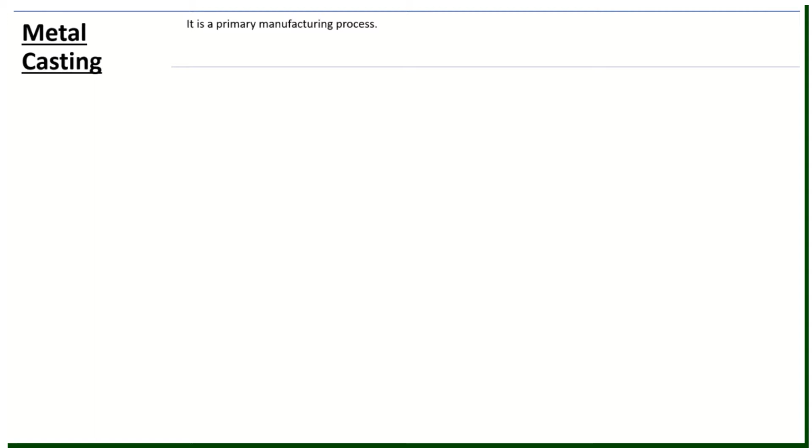Generally, this process uses liquid metal to produce desired parts. Casting is one of the earliest metal shaping methods known by human beings. It involves pouring molten metal into a refractory mold, which has a cavity with the desired shape, and then this liquid metal is allowed to solidify. Once it is solidified, the object is taken out from the mold.

This casting process has various advantages. Let us see why the casting process is being used widely, even though it cannot produce parts with high dimensional accuracy and good surface finish.

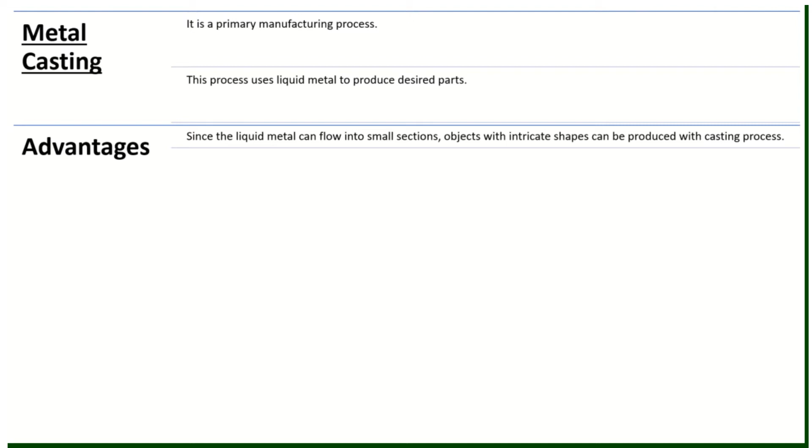Since liquid metal can flow into small sections, objects with intricate shapes can be produced with a casting process. This is the first advantage. Because of this nature, complex geometrical objects can also be produced with casting operation, so it is being used widely. This casting can be done for both ferrous as well as non-ferrous metals.

The infrastructure of casting, that is the tools and molds used in casting, are very cheap and simple.

The casted products don't have any directional properties, because once the liquid metal is allowed to solidify, all the parts of the casted product cool uniformly in all directions.

Casting can be performed for parts with a larger size and weight. These are the advantages of the casting process, and because of these advantages, the casting process is widely being used in manufacturing industries.

Apart from the advantages of casting, which has several limitations, let us see what are the drawbacks or limitations of a casting process. The casted products with high dimensional accuracy may not be achieved in the sand casting process.

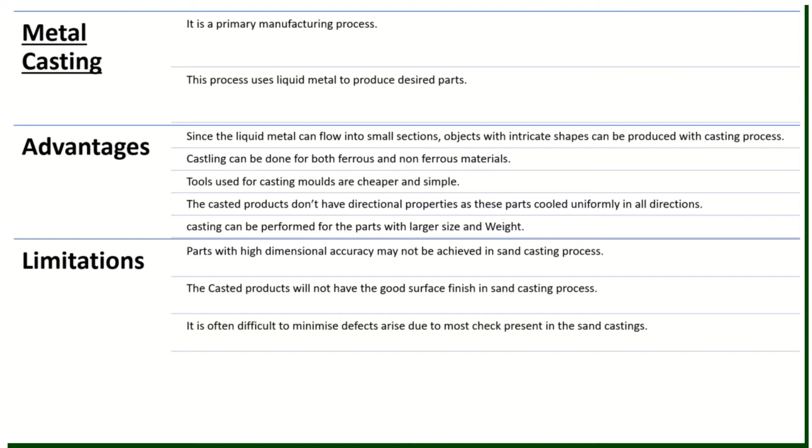It is often difficult to minimize the defects that arise due to moisture present in sand castings. Since it is liquid metal, and the sand content has moisture present, the casted products will have certain difficulties and defects. So it is very difficult to minimize such defects that are due to this moisture content in the sand castings.

This casting process is widely used in various applications. Many of the automobile parts and machine components are made up using the casting process. Typical casting products are cylinder blocks, liners, machine tool beds, piston rings, wheels, and bells. These are the various automobile parts that are manufactured with a casting process.

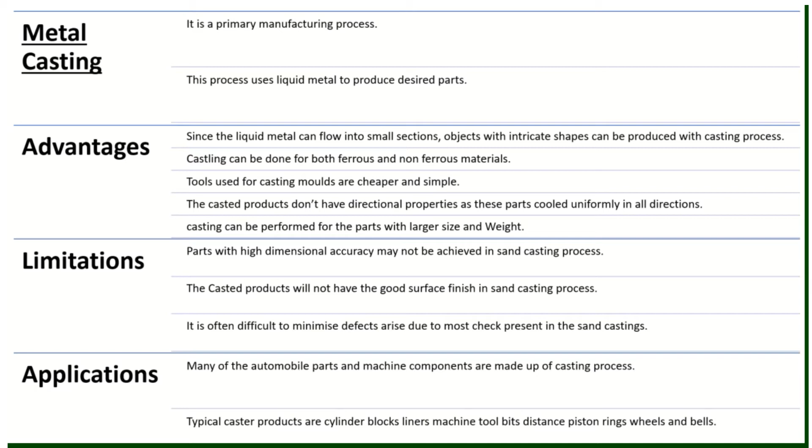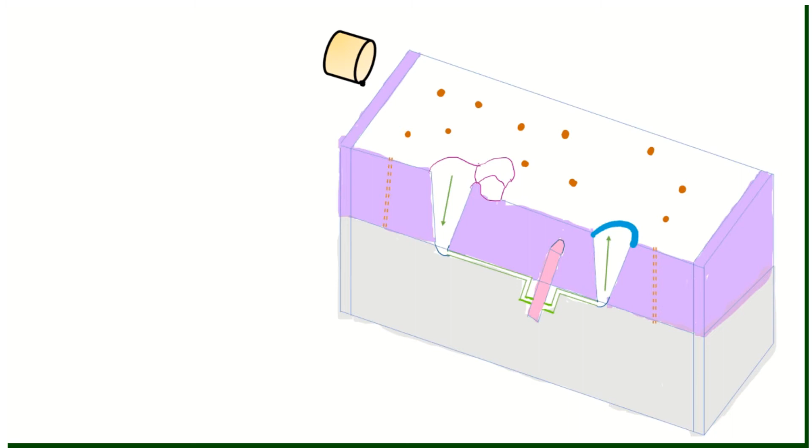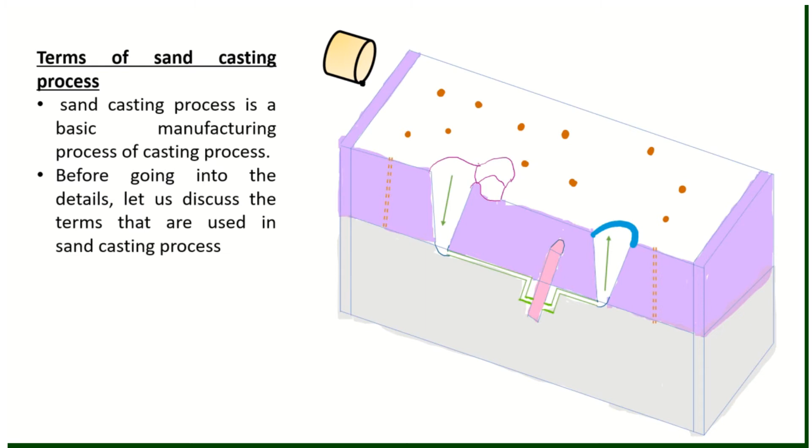Now let us have a look at how the casting process is actually carried out, and what are the various terms or nomenclature of a sand casting process. This sand casting process is a basic manufacturing process of casting. Before going into the details, let us discuss the terms that are used in sand casting process.

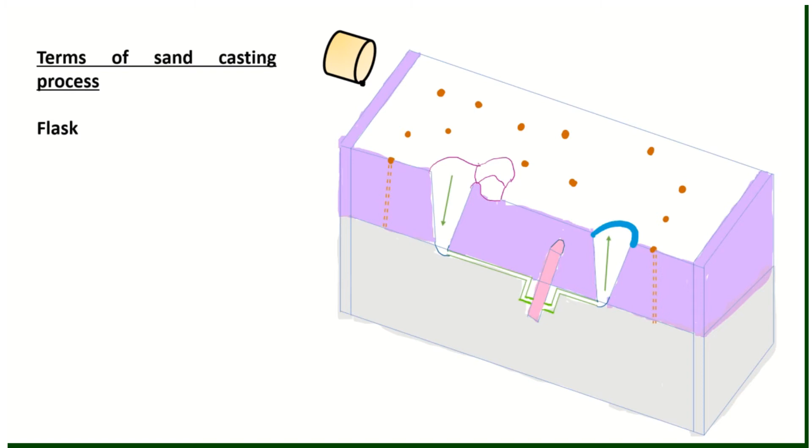In casting, the first term is flask. Flask is nothing but a molding flask which holds the sand mold intact. Depending upon the position of the flask in the mold structure, it may be referred to as drag, which is the lower part of the mold.

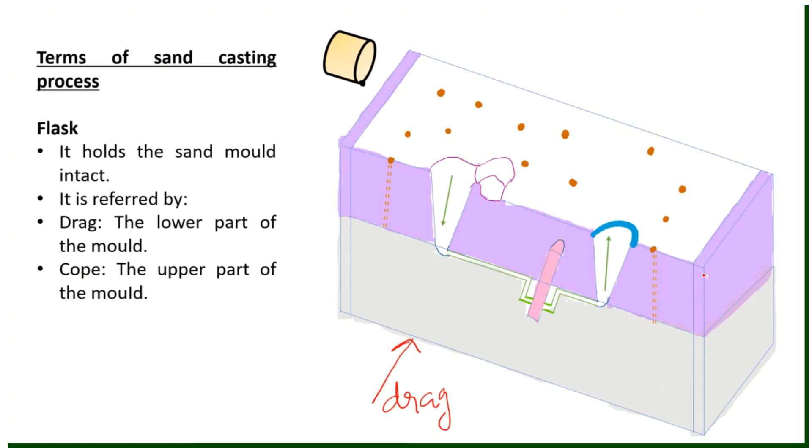If you see this gray colored part, the area occupied with gray color, that is the lower part of the mold, it is called the drag. And cope, the upper part, which is in purple color, so this colored upper part of the mold is called the cope.

So the complete setup of this cope and drag is called the flask. Sometimes we may use a cheek, that is the intermediate part between drag and cope, but for simplicity, a simple sand casting process involves only cope and drag as the mold or the flask.

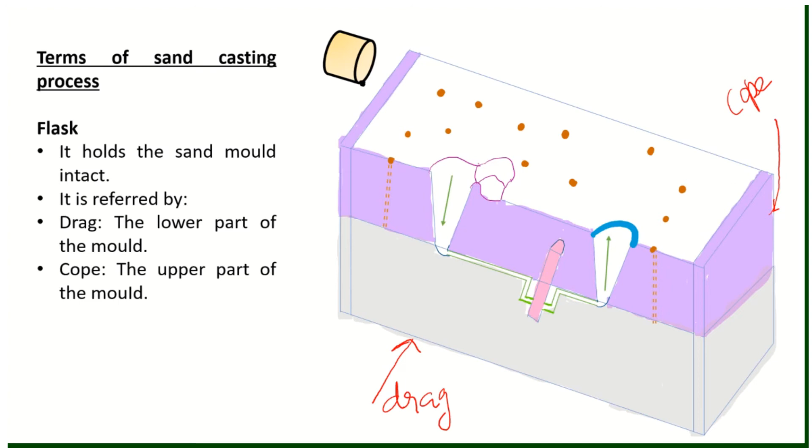The next term is parting line. Parting line is the dividing line between the molding flasks, okay. So we have drag and cope. The dividing line, so if you see here, this is the dividing line of cope and drag. So this line is called parting line.

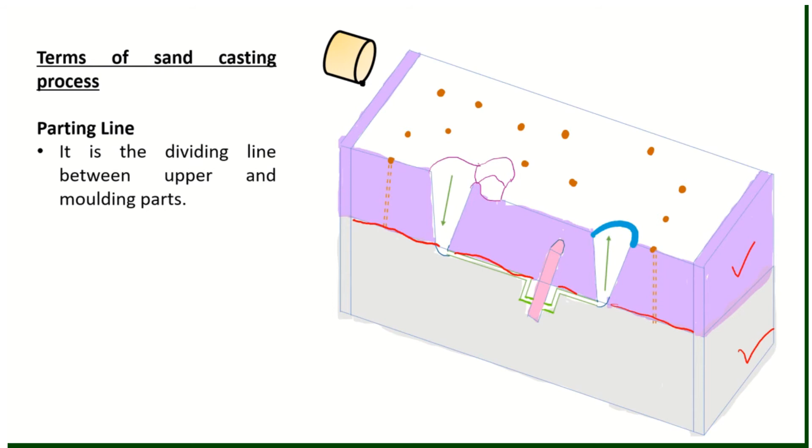So this is parting line. The pattern is first kept on the bottom board, and sand is sprinkled on it, and then the ramming is done on the drag. Of course, according to the split pattern, it is also the dividing line between the two halves of the pattern.

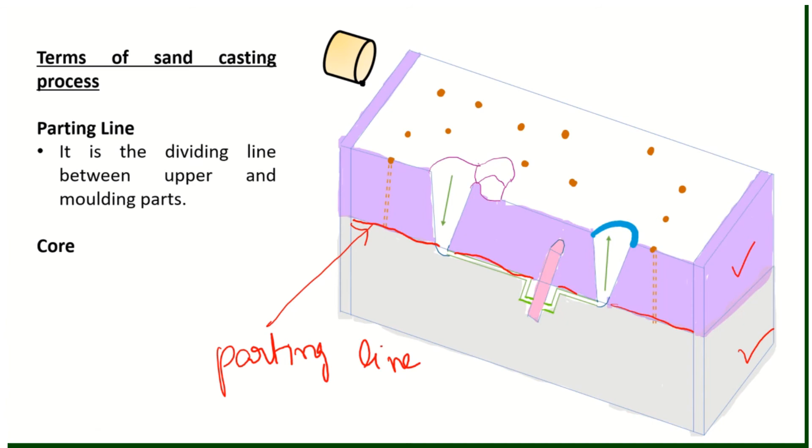The next term is core. Core is a tool which is used for making hollow cavities in castings. For suppose if you see this object, which uses some core, this part is the core.

The next term is pouring basin. Pouring basin is fixed at the top of the mold. So here this one is the pouring basin. It is fixed at the top of the mold from which molten metal is poured. So in this, that liquid metal will be kept, and the liquid metal will then be poured through this pouring basin. If you see this one, this is a pouring basin.

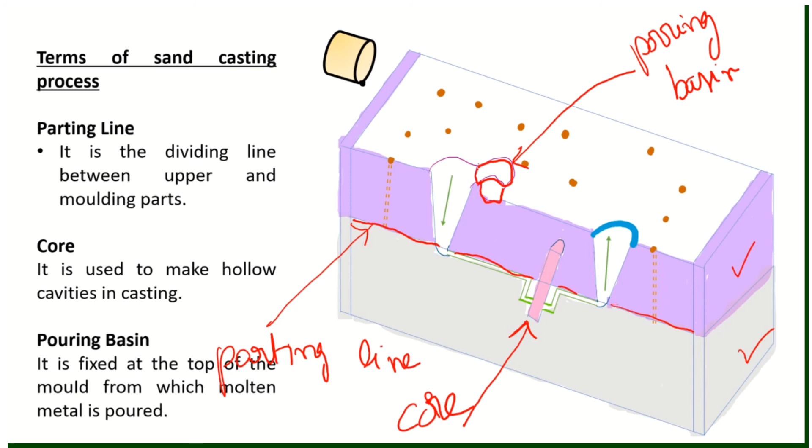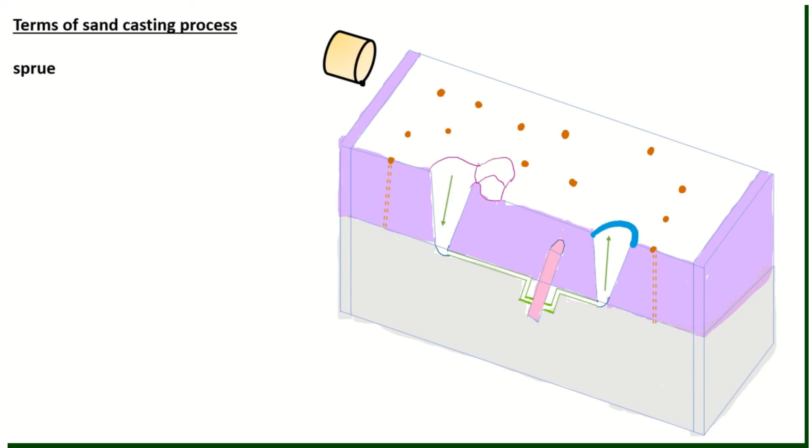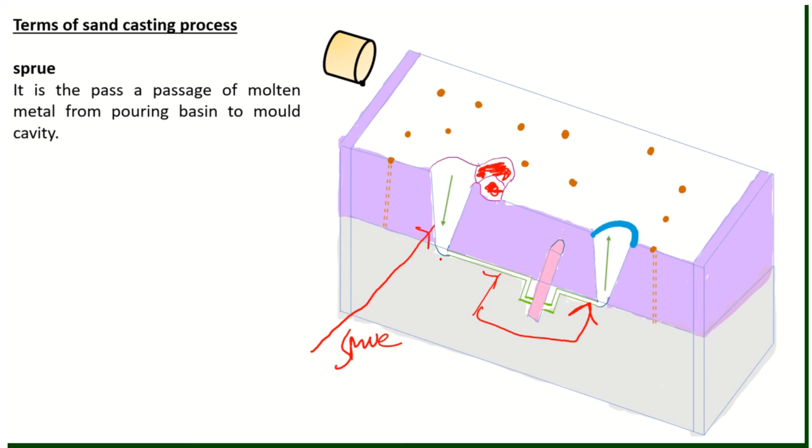Then the next term is sprue. Sprue is the passage through which the molten metal pours from the pouring basin to the mold cavity. So here this is the mold cavity, with the desired shape. This we know is the pouring basin, in which molten metal is kept. So this molten metal will be passed through this sprue, then it will reach the mold cavity.

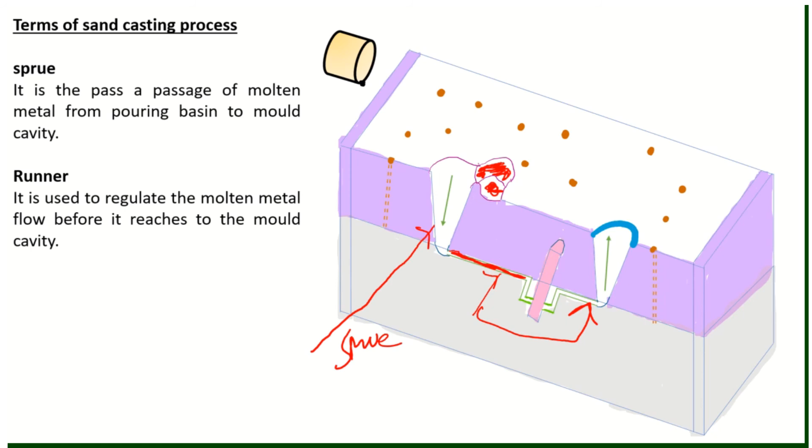Then the next term is runner. Runner is, you can observe the passage of the molten metal through the sprue. So this passage is nothing but the runner. It is used to regulate the molten metal flow before it reaches the mold cavity. So this is runner.

Then the next term is gate. Gate is the actual entry point through which molten metal enters the mold cavity. For suppose this is the mold, so this is the entry point, and through that entry point the molten metal will be flown to the mold cavity.

Then riser. Riser acts as the reservoir of molten metal. For suppose if the molten metal is flown through this sprue and it reaches the gate and then enters into the mold cavity, so if extra molten metal is required, then some of the molten metal will be kept at this riser. This is called riser.

In this riser we keep metal, and then whenever hot metal is required to flow back into the mold cavity, when there is a reduction in volume of metal due to solidification, this riser provides that extra material. So this is the purpose of fixing riser in the mold cavity or casting.

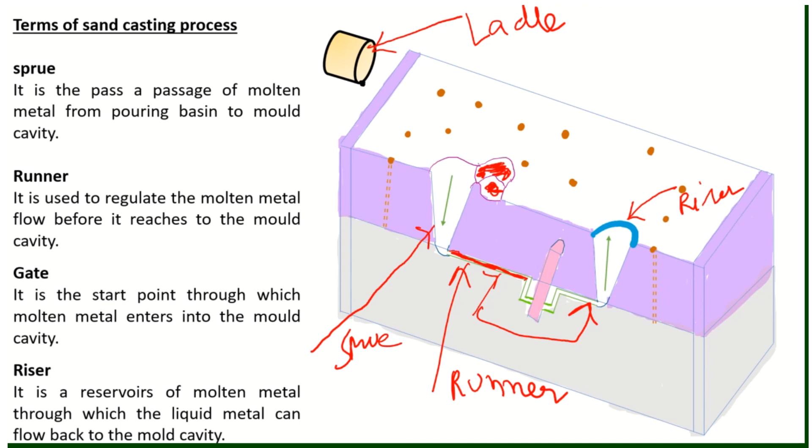And this part is called ladle, through which the liquid metal will be poured into the pouring basin. And then if you observe here, the brown color circles are nothing but the vent holes, vents. So this liquid metal, hot liquid metal, whenever it is flown through this passage or runner, some sort of hot gases will be coming. So these hot gases will be removed through these vents from the mold.

So these are the various terms that are being used in the sand casting process.